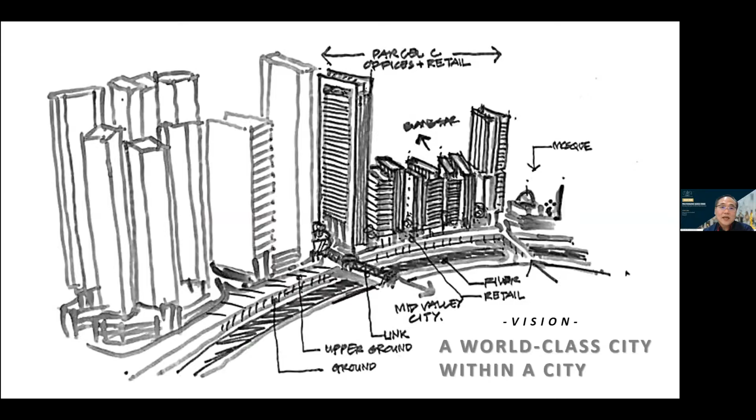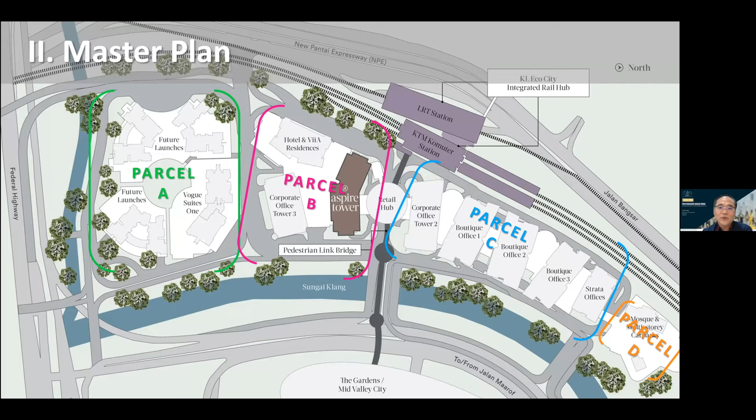The development was divided into 4 parcels. Parcel A is basically all residential. Parcel B is mixed use. Parcel C is the precinct where most of the office space is located, about 2 million square feet of office space.

This development was anchored with 3 main pillars: integration, connectivity, and sustainability. The first pillar, integration, is about internal and external elements. Internally, it's a self-sustaining city creating connectivity through bridges, pedestrians, and accessibility. Externally, it's about integrating the vibrancy of different elements and components.

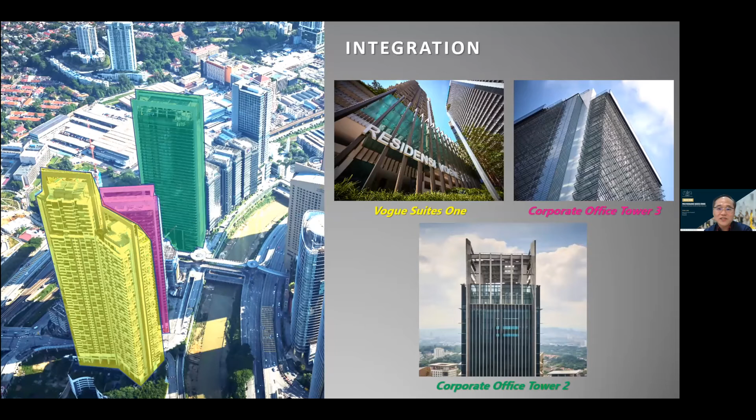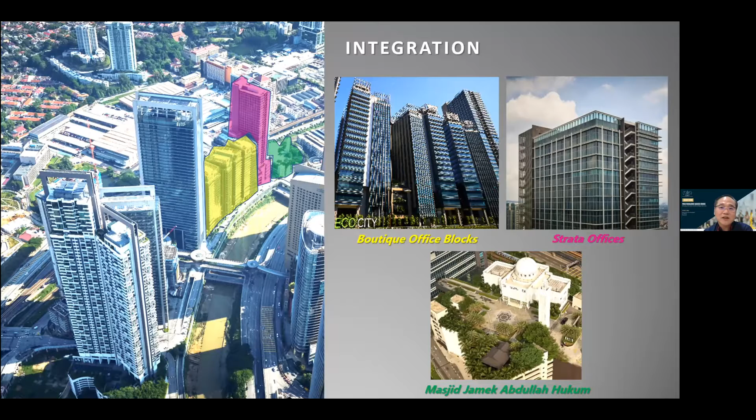The integration comes with apartments, offices, and corporate offices. You'll also see a mosque serving the community for the office area, all connected together as an integration. Another part of the integration is how it connects with transport, pedestrian linkages, and retail space that serves as an amenity to the whole development.

The second pillar is connectivity, which has 3 points. First is the integrated rail hub, with a light rail transit station and a new train station, giving two modes of public transportation within the project site, serving about 5,000 passengers a day.

The second point of connectivity is 6 dedicated incoming and outgoing ramps, giving better accessibility for car traffic and solving most traffic congestion problems. The third point of connectivity is the pedestrian network.

There's a pedestrian link between north and south, connecting the railway to the other side of the mega mall. There are also east-west pedestrian links connecting the residential area to the office and to the malls. These sketches show how north, south, and west are all linked through the pedestrian network.

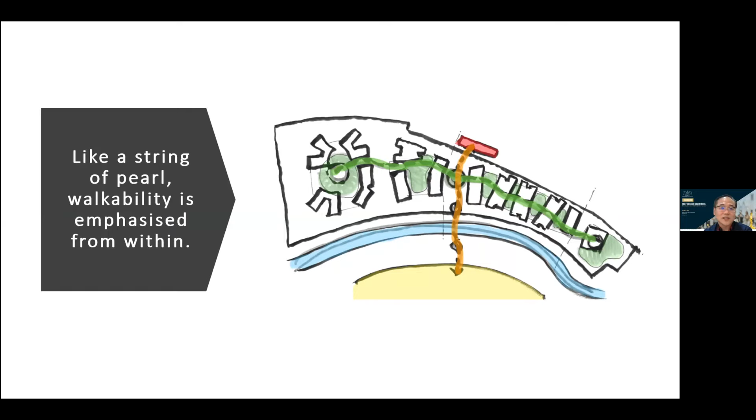It's walkability within itself. And the last pillar is actually about sustainability. Every building here has achieved at least one gold certification for an international or local green building rating system.

You actually have United States-based leadership, which is LEED. We also have engaged with Singapore BCA Green Mark, and in Malaysia itself, we also have our Green Building Index.

As far as the green building accreditations, you're actually looking at all these 5 points: energy efficiency, indoor environmental quality, sustainable site, material resources, and water efficiency. This is the things that we're looking at actually.

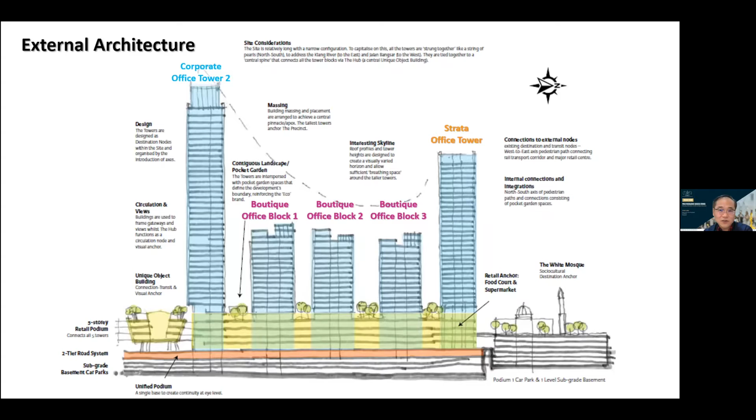In terms of the architecture of the whole development, we started with the most important part, which is how we work on the massing itself. Because of the narrow part of the whole site, we work on the massing so that we have high towers intersecting with smaller and medium size buildings, with a few nodes of the hub and the malls. You interconnect it so you have better circulation in terms of the view, and create a more interesting skyline between them.

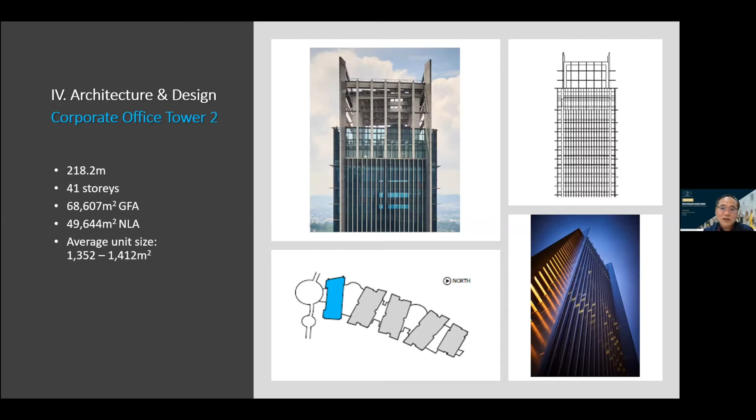The highest tower is actually Corporate Office Tower 2, which is 41 stories. It has a net lettable area of about 49,000 square meters, and each floor is about 15,000 square foot. This building is accredited with the Malaysian Green Building Index Gold.

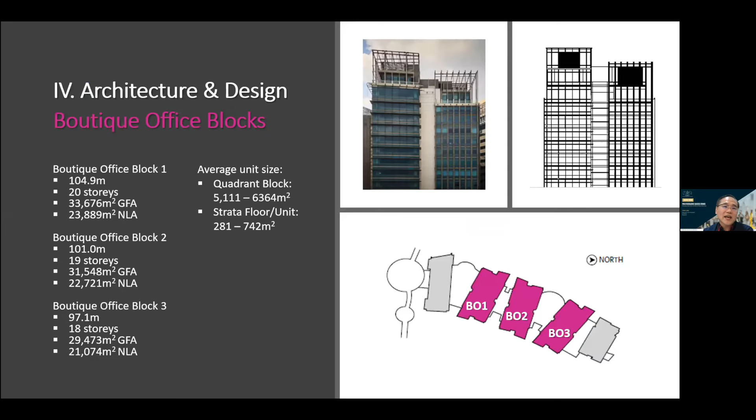The boutique office, the smaller lower floor building, has 3 blocks, divided into a quadrant, actually divided into 4. Each part of the building has a different facade - you can see horizontal fins and vertical fins to make it different. Each floor is about 4,000 square foot area.

The last tower behind it is called Strata Office Tower. It's about 35 stories, with a net lettable area of about 25,000 square meters. Each floor has about 8 units, which is for sale for investors or owner-occupiers.

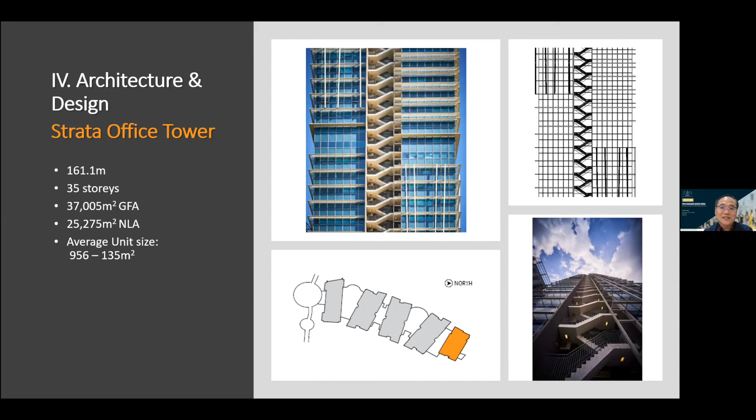You can buy a unit. This building was designed to have an exposed staircase where you can see the interlace of the features, so you can feel the difference. This building is accredited with LEED Gold.

In terms of interior design, the main design is at the lobby itself. For Corporate Office Tower 2, we have about 10-meter height office lobby - that's the main lobby where you feel the grandness of the office tower. The boutique office also has a quite nice lobby, very luxurious, since you actually own it yourself.

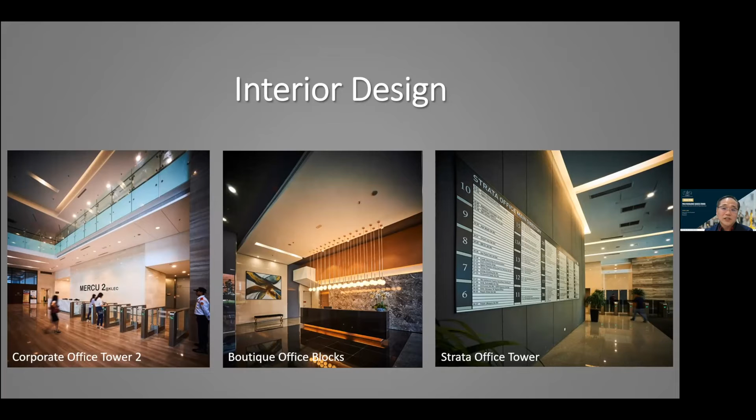And Strata Office also has a very nice office lobby that is enforced with different kinds of tenants residing in the site.

The boutique office tower is owned by an individual owner, and each block, as I said, is a quadrant divided into 4 units. Each unit has 3 lifts serving it, and these units are only 4,000 square foot. A lot of them use it as a penthouse office for their own use.

The design of the whole thing is really, really very nice. And lastly, the Strata office - the whole floor is 8 units. They have a common pantry, and these are mostly used by small firms or startup companies, using it as a flexible layout as part of the office.

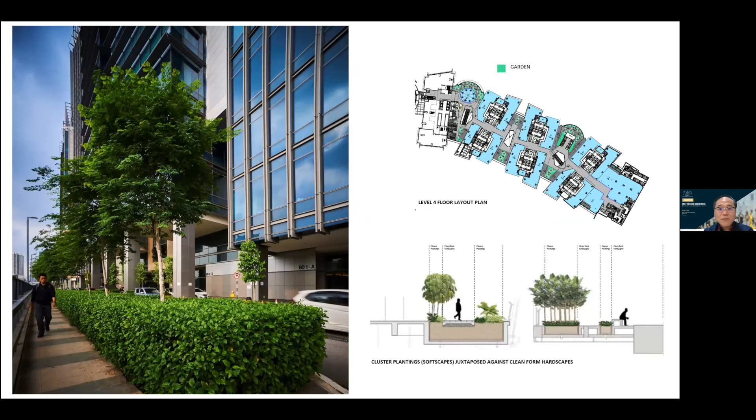You're going to have hanging greens around. You have a pedestrian area with a nice green part that separates the driveway and the pedestrian walkway, and a lot of mini green areas to soften the space of the whole office area.

Inside the office, you also have a courtyard that creates pocket gardens to give a different kind of feeling about the landscape together with the whole building. These are the plant selections that we have within the office tower itself.

On top of that, we actually have a space that we already built as a community service for the society. We built a mosque next to the office tower - it's elevated on top of the car park, and with that mosque around, you see a very nice landscape has been built up there.

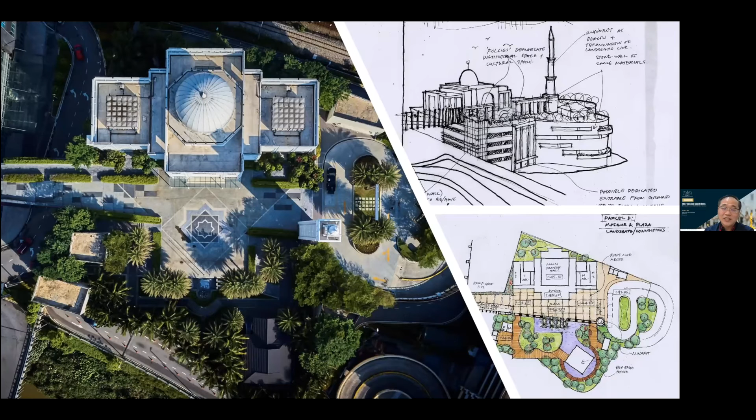We actually have a community space that everyone can enjoy.

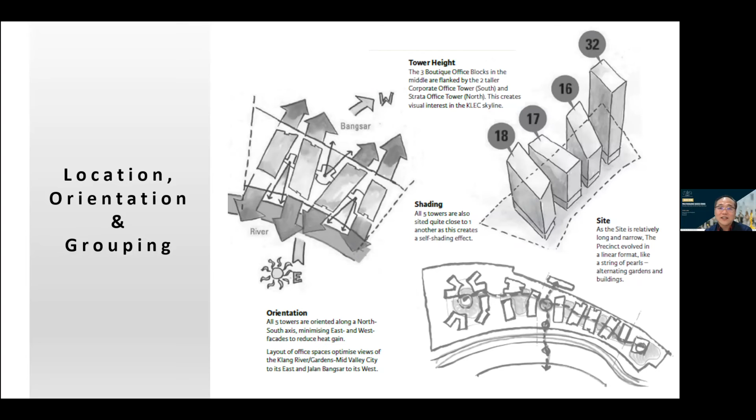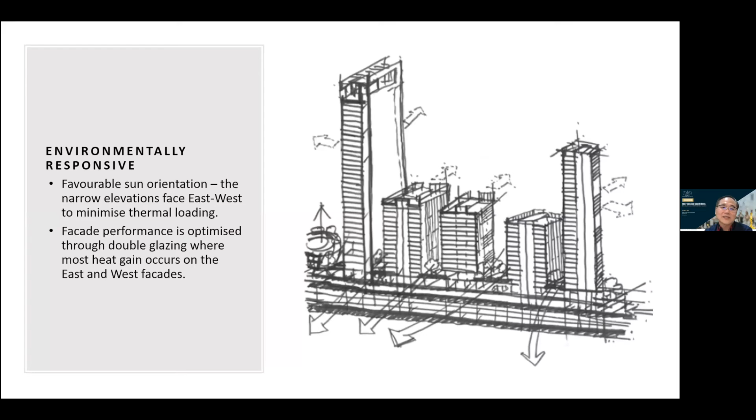As a sustainability feature, the building itself has been oriented to face west and east with a smaller facade, which reduces heat absorption through the windows. You then have a bigger surface area facing south and north, which minimizes the thermal loading. This facade adjustment, combined with double glazing, helps reduce heat gain.

At a glance, looking at the overall sustainability: energy efficiency and water efficiency are there, along with the solar reflectance index. We use different materials to reflect sunlight away at the roof, so there's less heat and less cooling needed. For thermal comfort, all the windows have double glazing with a low-E coating seal, which reduces 70% of the radiant heat and saves energy.

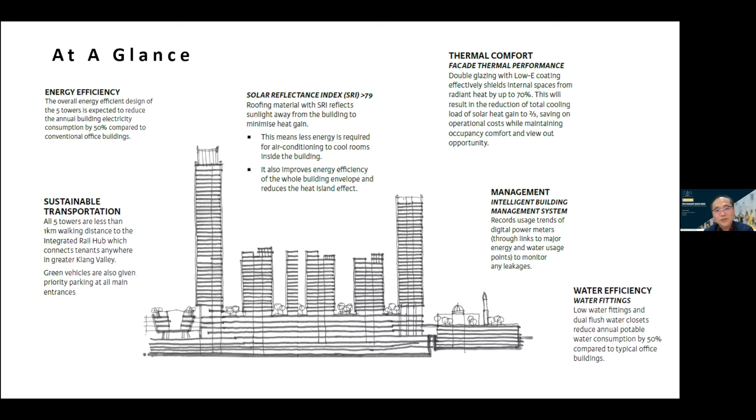Last but not least, for sustainable transportation we have two modes. Public transportation reduces the carbon footprint, so people don't use cars but instead use public transport to come to the office for work.

And these are the sustainability things that we provide: solar panels and water efficiency. We harvest rainwater and greywater, saving about 20,000 cubic meters of water a year, which helps with landscape irrigation and saves a lot.

We've also engaged an intelligent lift system using clean drive technology, saving 50% through LED lighting and optimized motors. Most importantly, it uses PORT technology with destination floor calling, which manages the system of calling the lift to your space, saving a lot of energy.

On top of that, we have a semi-automated waste collection system that reduces smell and fire hazard, and removes the need for owners and occupiers to transport waste via the lift. It reduces contamination and also helps reduce CO2 emissions, since you don't need as many garbage truck trips.

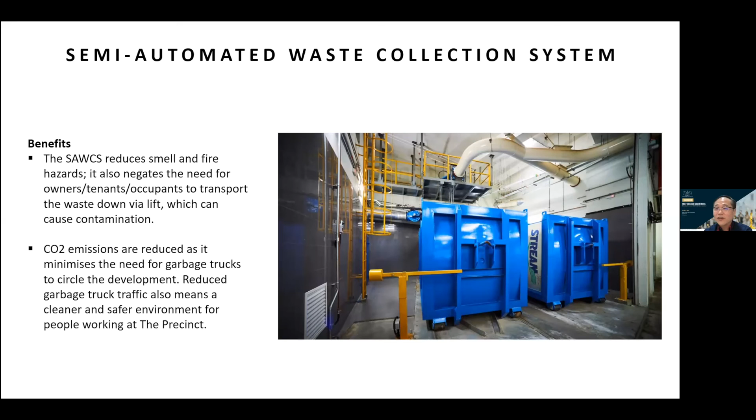Finally, when we redeveloped this area, there was a house owned by the late Haji Abdullah Hukum, one of the first Malay settlers and a village head. This house is a historic house, 130 years old.

We protected this house as a heritage site, removing it exactly as it was and rebuilding it as part of the heritage on top of the mosque. This maintains the heritage as part of the restoration, for the purpose of culture, heritage, and community.

Lastly, I'd like to play a 3-minute video for you to see exactly what KL Eco-City is about.

KL Eco-City, a 25-acre sustainable transit-oriented development located in the heart of Kuala Lumpur's new Golden Triangle. This development is founded on 3 pillars. First pillar, integration: as an ultimate self-sustaining live, learn, work, play ecosystem, KL Eco-City features commercial offices, retail outlets, luxury residential towers, and a business-class hotel.